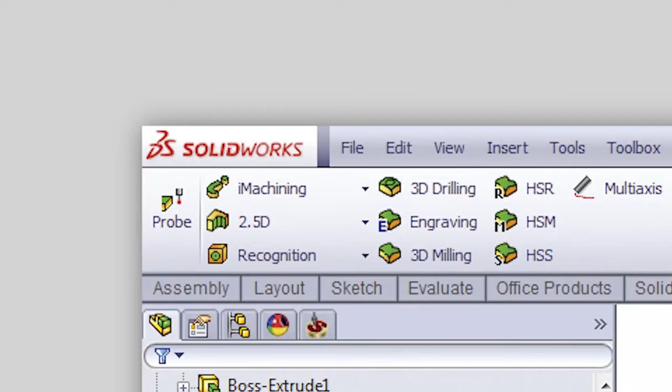We had many resellers at that time. Since the product is integrated in SolidWorks, a lot of SolidWorks resellers evinced interest in joining us. But it was not a smooth ride, and soon we realized that the market was not so receptive for us.

Eventually we persisted, thanks to great support from my CEO, Dr. Emil Somekh. He believes India is a great country with great potential. So we persevered for a couple of years and then our growth story began.

Today we are a 50-man company, man and woman basically, we have both. In fact, I'm very proud that in my company the maximum number of female employees are working, especially on the mechanical side. It's not really common for them to be working in this part of the business, but I've got a lot of them, very strong.

We are a 50 employee company today, growing every year approximately 20 to 25%. That's basically our journey of SolidCAM, and we have more than 1,500 customers today in India.

1,500, that's a fascinating story. So in what sectors are your customers? Aerospace, defense, what kind of sectors?

Majority of our customers, since SolidCAM is scattered all over India -- if you look at the southern part of the country, 90% of our business comes from aerospace. But as you come upwards to the western part, we are more predominantly into die mold and production. As we go up further, then it's medical, power, oil and gas. These are all the sectors predominantly where we are present in India.

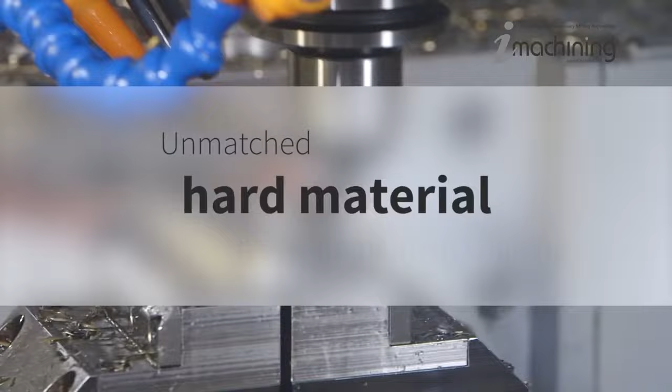The claim to fame of iMachining is that over the last decade we have seen our customers save anywhere between 70 to 90% of their time on the machine using this technology, keeping everything the same -- the machine, the material, the tooling, and the fixturing. Changing just the programming to iMachining allows them to save approximately 70 to 90% on hard materials, even with the smallest of tools.

This is a patented solution, nobody can copy us. iMachining basically has 2 components: one is a patented pattern generator, and the other is a patented solution called Technology Wizard, which comes up with the most optimum cutting conditions for that given machine, material, geometry and tool. This is our USP.

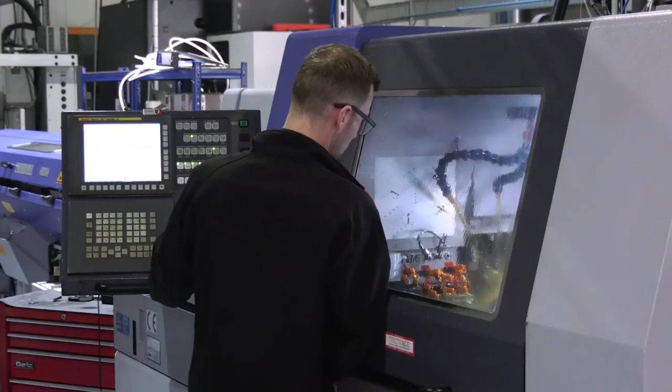Since the last couple of years, we also added another very interesting solution for machining or handling Swiss type machines. We were very novice a few years back, but I'm very proud to say that from last year we have become very powerful and are becoming more and more an on-demand solution for handling Swiss type and really complex mill-turn machines.

I have also worked with a lot of Swiss type machine manufacturers in the past. These kinds of machines are being used more and more in India, especially where very high precision machines are required.

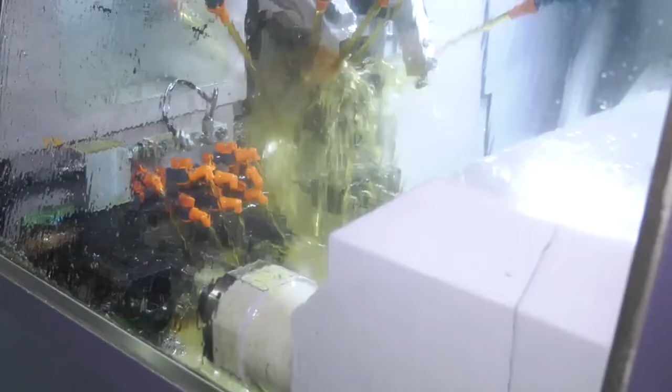I think that is a very interesting product, and I've heard that nobody else has this kind of product. Yes, Swiss type solution is basically a very complex solution, and more than the product, it's the support and the post-processor ability that matters more in Swiss type machining. SolidCAM has all these three components right: the product, the support, and the post-processor, all very powerful, including our support to handle these machines.

Very interesting. And how do you support your customer? I've heard from a lot of your customers that you have a very good after sales and service support team.

If you look at my team today, out of the 50 people, about 70% are into support. They are basically hired to do after sales support. And we have two modes of support.

One is online. Because of the pandemic, we learned in a very hard way that we could also support customers using the online mode, and we still continue that. Most of the trainings and basic support still happens online. But for complex situations, online doesn't work.

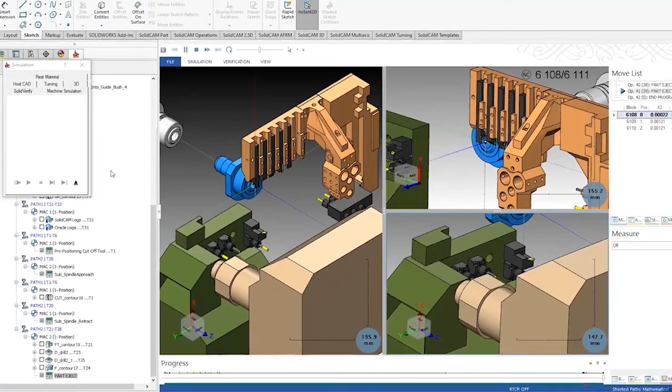Our engineer has to go to the customer's place to do the support. So this is basically how we work. And the most important thing is training. We invest a lot in training customers, so that if the training is done properly, our support calls drop dramatically. So we invest a lot in our training also.

That's a very innovative approach, like you are training your customer so that they can solve their problem themselves, and then you are using online media to solve the problem. That's right, at the end, the problem should be solved for the customer, and that too quickly.

Right. So we are at this die mold show, so talking specifically about die mold manufacturers, what kind of help, if their viewers are watching, can SolidCAM give to die mold manufacturers? Ashutosh, if you had asked me this question two years back, I would have said, apart from machining, we probably cannot help much to the customers in die mold.

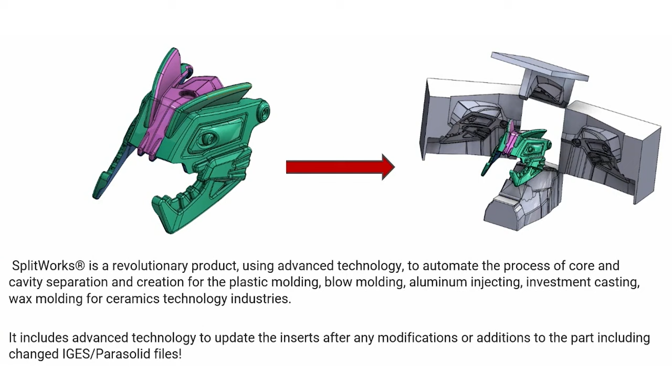However, since last year, we have started working very closely with another company from Israel called R&B. This company develops solutions for mold design and electrode design. So we have got a full solution now inside SolidWorks, where we can offer part design, which is predominantly from SolidWorks. And then we have a product called SplitWorks, which takes the part design from SolidWorks and splits it into core, cavity and sliders very easily.

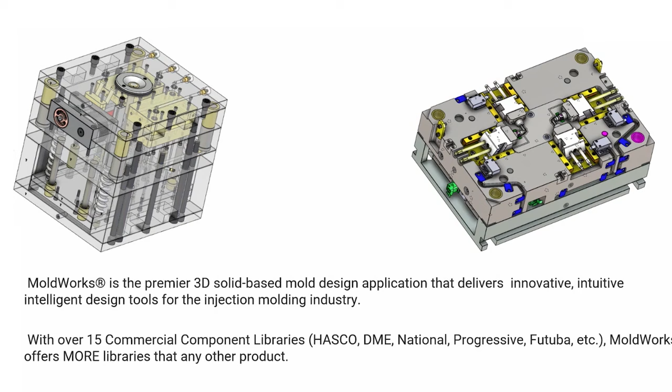Once the core, cavity and slider design is done, we have a product called ElectrodeWorks, which helps design, document, and manufacture electrodes for the EDM process. Once SplitWorks and ElectrodeWorks is done, the entire tool mold can be built using the product called MoldWorks, where we support more than 15 different catalogs from all over the world. And of course we have SolidCAM, which is a very powerful system for 3-axis and 5-axis machining. So we can now support the entire process, right from part concept design up to manufacturing, everything in one software, in one window, using single window integration with SolidWorks.

Very interesting, sir. So I'm sure the viewers looking at this might be interested in 70% savings by using your iMachining patented technology. Call us, test us - that's my next question.

To the millions of viewers of MTD CNC, can you tell how should they contact you? You can go to our website, www.solidcam.com, or you could write us at info.india@solidcam.com. Write to us, challenge us. We are more than glad to help you cut down your machining time on the machine using iMachining and SolidCAM.

Thank you sir, thanks a lot for your precious time. Thank you, always Ashutosh, a pleasure meeting you. Thank you. Same here, thank you.